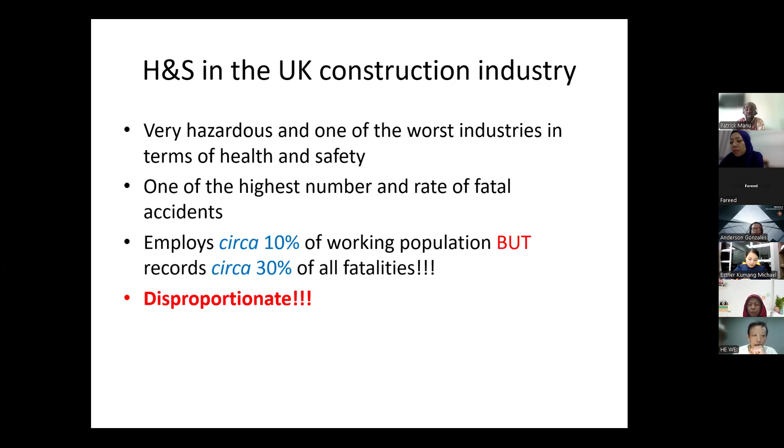The industry employs about 10% of the working population, but it accounts for about 30% of all occupational fatal injuries. So that's very disproportionate.

In terms of non-fatal injuries, there were about 53,000 of them over a 3-year period, 2020-21 to 2022-2023. Here are the things that accounted for them: slip, trips, fall on the same level, fall from height, and other things. That's a very huge number.

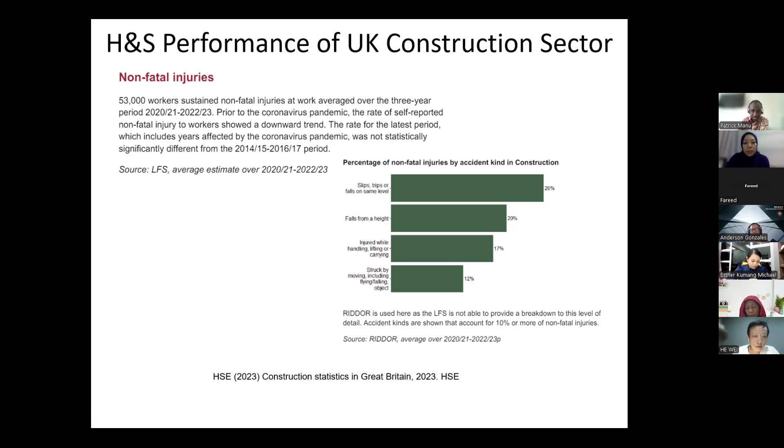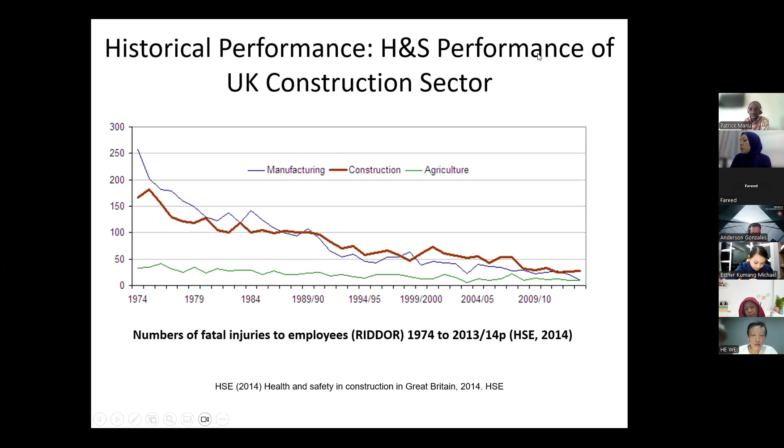It's dated now, but what I wanted to show you is the trend. Consistently over the years, construction has recorded the largest number of fatal injuries from 1974 to roughly 2013, 2014. There were times manufacturing topped it, but you see that construction beats it several times. It's been the worst. But the positive thing is that the trend is a downward trend, so we've been seeing improvement over the years, which is on the positive side.

Again, in terms of historical performance, this looks at the health side of things. The bluish box shows construction, and this one shows all industries combined. It's interesting seeing that if you put all industries together and compare that with construction, construction has the worst work-related illness record. That was from 2001-2002 all the way to 2013-2014. Things may probably be better when you compare construction with all other industries.

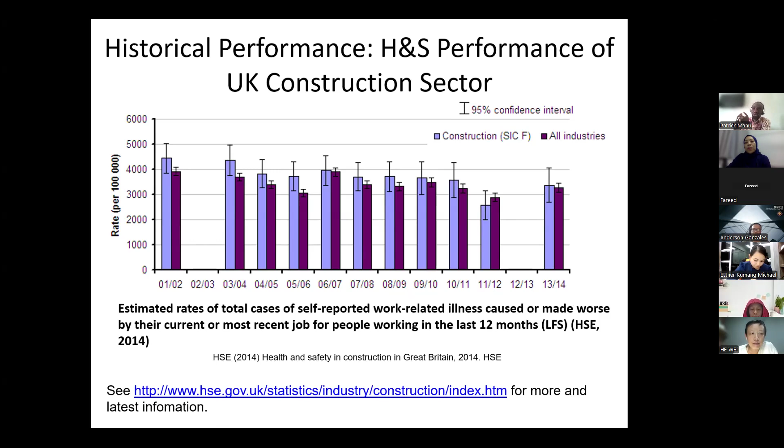But from the previous slide, you saw that having 69,000 ill health cases is still quite a huge number for our industry. So clearly, in terms of safety, that is injuries to people, construction is dangerous. In terms of ill health, construction is also a dangerous industry.

Now let's move outside the UK and look at what's happening in other parts of the world. This is from Eurostat, as at the time I think that was last year, that was what they had. They may have updated their database, but looking at this trend, it tells you that construction has historically had the worst health and safety performance compared to other sectors like manufacturing and agriculture.

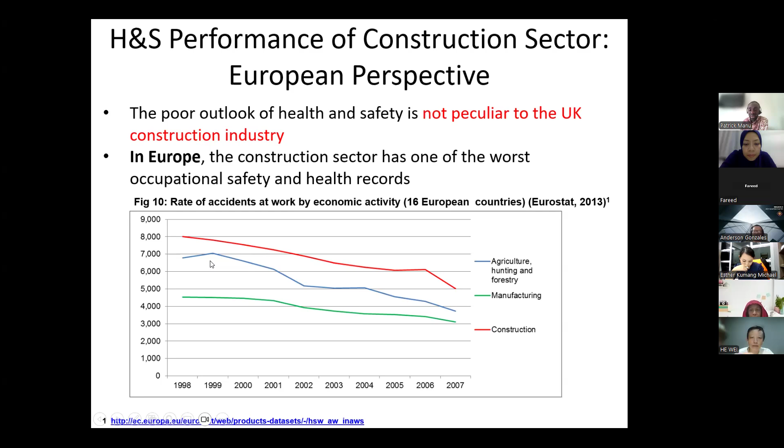If you look at the US, data I got from the US up to 2019, you see construction recording the largest number of fatal injuries - that's compared to transport, agriculture, government and other things. So construction is one of the most dangerous sectors in the US as well. In 2019, they had over 1,000 fatal injuries all across the US. Well, you can say the US is a big country with 50 states, so it's not surprising they have a lot of fatal injuries, but this number is still a lot.

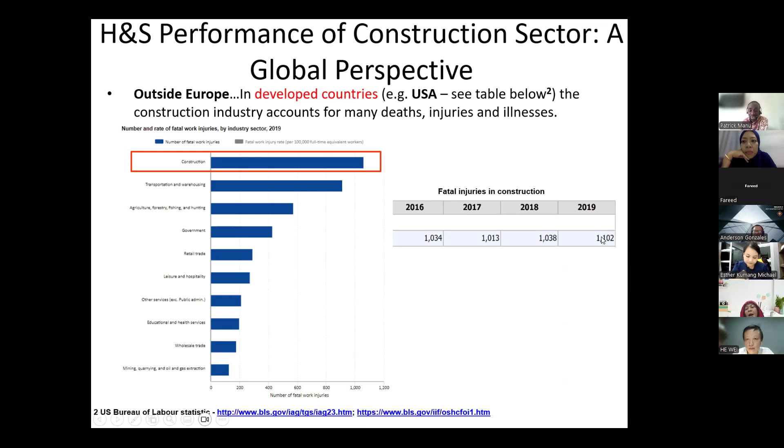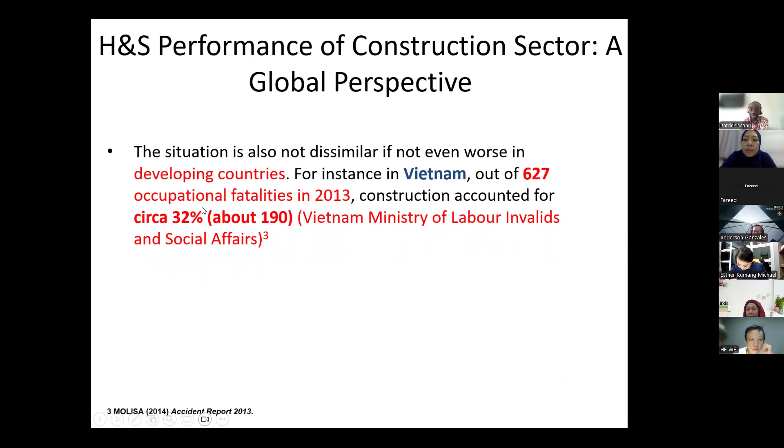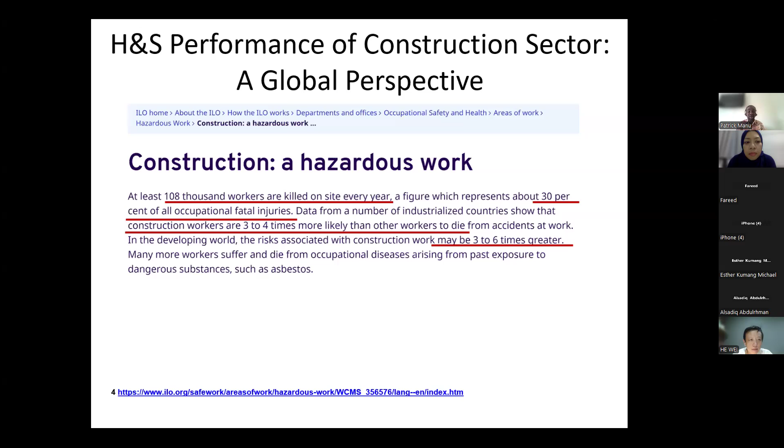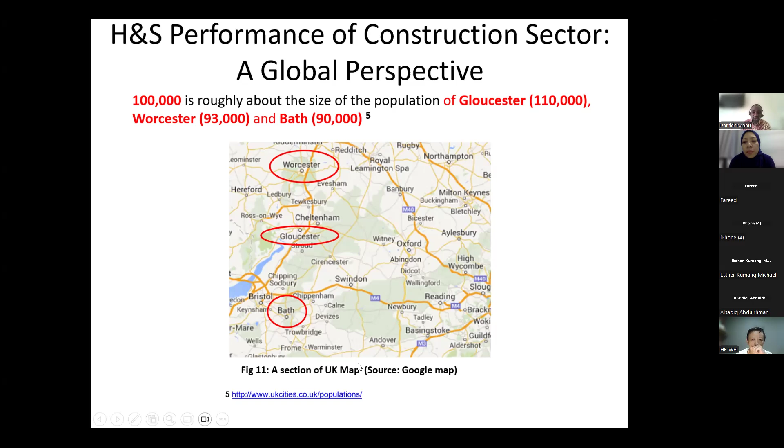Putting this global statistic into perspective, 100,000 is roughly the size of Gloucester in the UK, population about 110,000. Worcester is about 93,000 and Bath is about 90,000. So that's huge - it's like the entire population of a town or city being killed as a result of work in construction. That tells us we certainly need to do something to improve health and safety conditions within construction.

Okay, so now think about the next set of slides I'm going to show you. What are your thoughts on these images? What do you think about this site? You don't need to respond, but just think about it.

Is it very clean? I think cherish life and stay away from construction. Okay, good, thanks. So just think about it - you don't need to say anything or type anything, but thanks for that anyway.

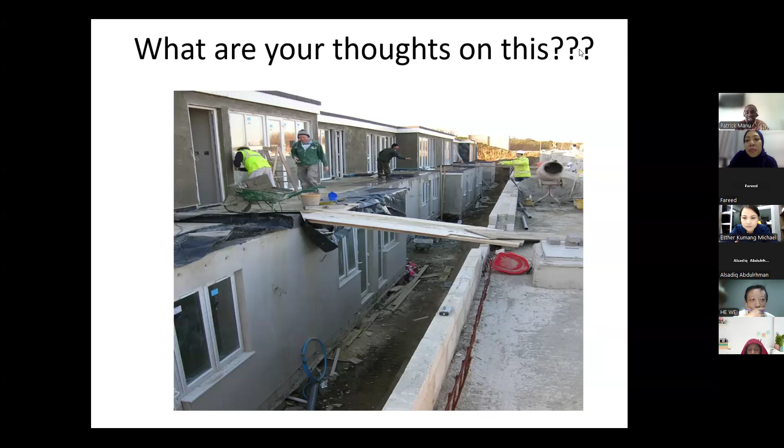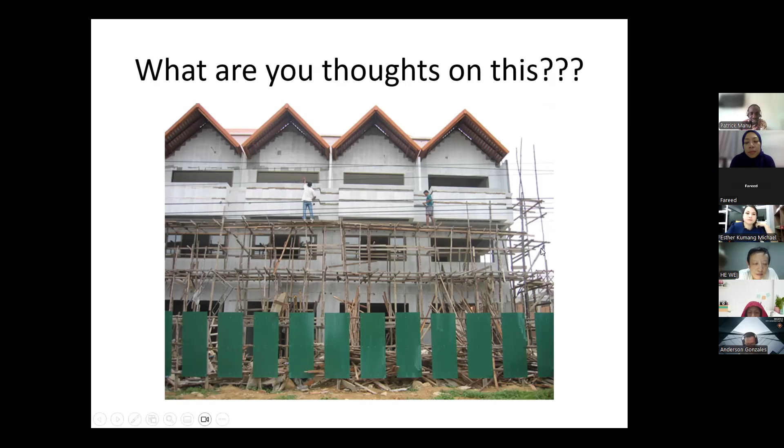But clearly you can see that it's an untidy site, and an untidy site is a dangerous site. That's another interesting image about a construction - you can see down there is very untidy, and people are working without fall protection, and it's very dangerous down there. Should someone fall, they'll be in a really bad state given how untidy the floor is. And some of the scaffold is probably not very stable.

So what do you think would be the outcome of those images we saw? This could be an outcome when things are not done safely - the collapse of a mobile crane. I think this happened in Manchester where I live, reported in the Manchester Evening News. I don't know the date, but it looks like it happened in Manchester.

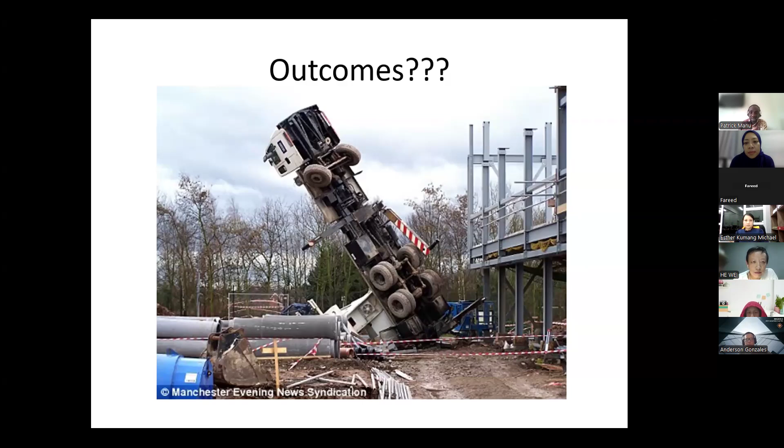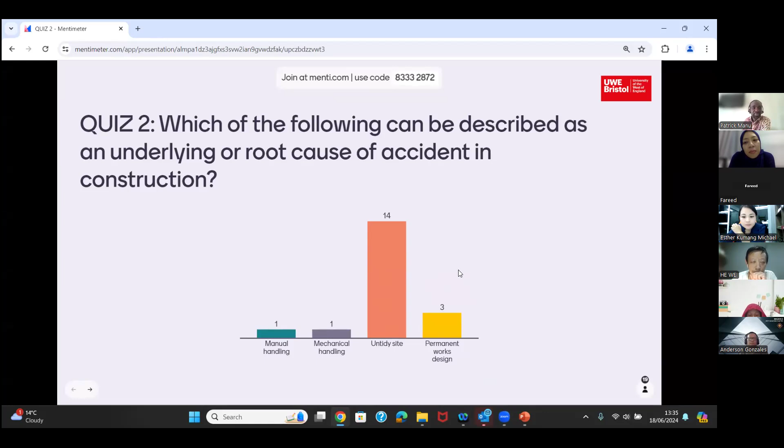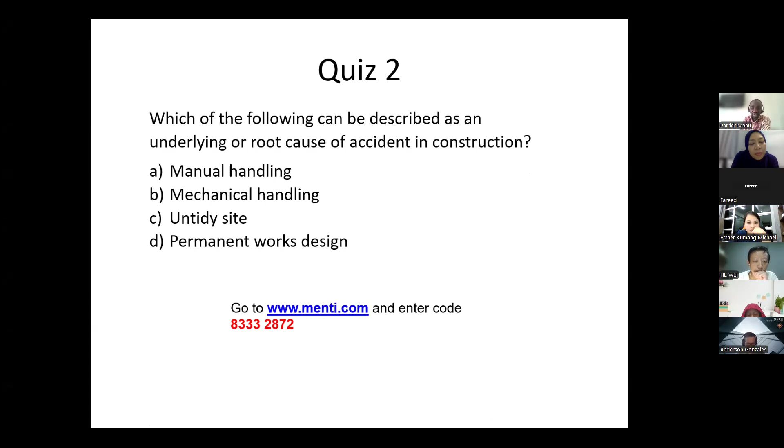Let's go back to our presentation, and you'll find out as we go on. So the case to improve health and safety in construction - we'll come back to this at some point. We've looked at the outcomes, and now we need to improve health and safety in construction.

So why do we need to do that? Okay, because apart from the injuries, deaths and illnesses, there are also economic and social costs that are associated with these injuries, deaths and illnesses.

These costs are borne by the employer, so that could be the contractor or subcontractor. They are borne by governments through medical care, providing care for people who get sick or injured. They are borne by the workers themselves, the employees, clients of the project, the whole industry, and society as a whole. So the costs are spread across several stakeholders.

And these costs can be very huge. For example, in the UK, the Health and Safety Executive, which is the equivalent of DOSH in Malaysia, estimated that it costs society about 1.3 billion pounds for health and safety.

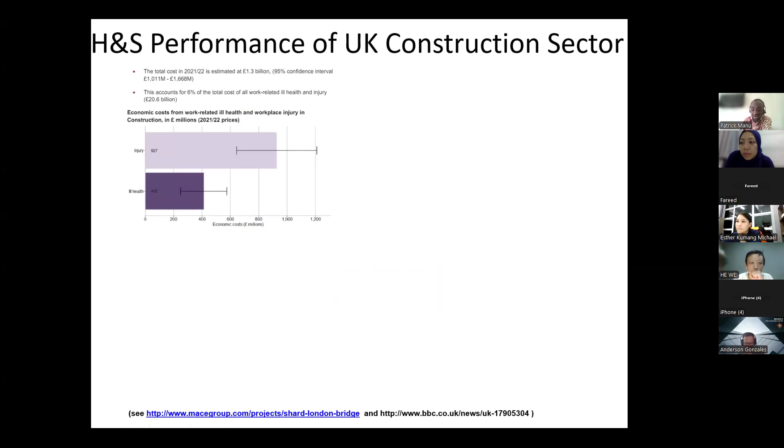So let's think about what we could do with 1.3 billion pounds. If somebody calls you today and tells you that you won a lottery of 1.3 billion pounds, guess what you can do with that amount of money. You could probably buy so many houses and maybe sell them or do something. So what can we actually do with this 1.3 billion?

In the UK, when we did the London 2012 Olympics, the Olympic Stadium cost about 500 million pounds around the time it was built. And the Shard cost around 500 million pounds as at the time they did that estimate. So you can imagine 1 billion pounds can get us one of this and one of that.

So if we are able to drive down injuries and illnesses in construction, that means the industry or society will be saving this amount every year, here in the UK. So that means there's a real need, apart from preventing people from getting hurt and injured, there is also the economic case to reduce illnesses and accidents and injuries in construction.

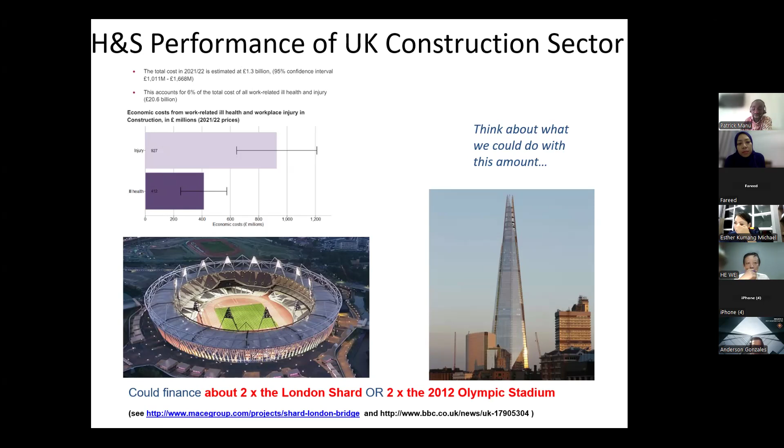So a lot of... and when we think about the cost of these accidents, whereas it's easy to estimate the direct cost, some of the costs are very difficult to estimate. So we may not actually know or fully appreciate the cost associated with accidents in the workplace or accidents in construction.

So there are other indirect costs associated with it, apart from the direct cost. And there are other intangible costs, like lowering the morale of the workers. If somebody gets hurt or killed on site, morale goes down because people feel they've lost a friend or a colleague, and that will dampen the morale of the workers, and damage the company's image. It's hard to quantify in terms of money, but if a company's image is damaged, they may not get work to do again, or for a long time.

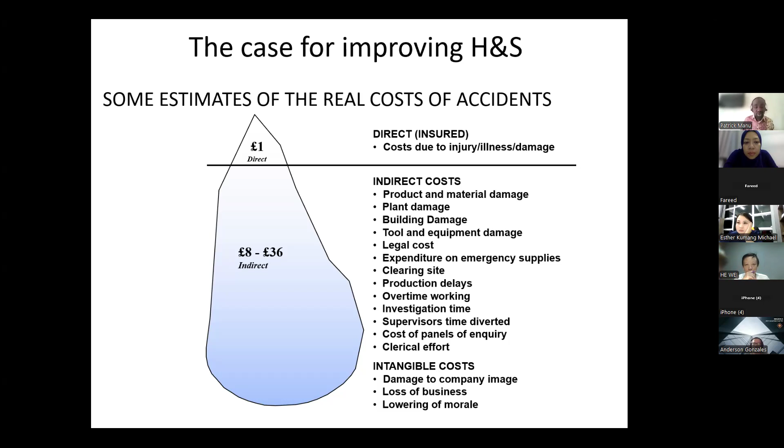So these are some of the costs associated with accidents in construction. So the quiz 3 is still there.

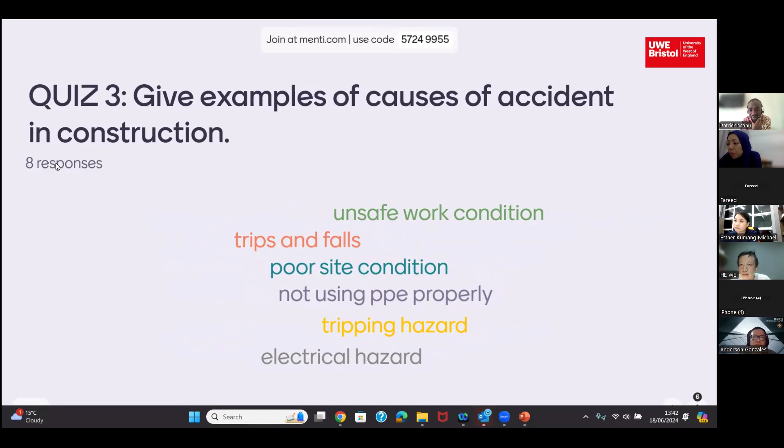Someone says trips and falls. So one person has responded. Any more? Unsafe work condition, tripping hazard. Not using PPE properly, electrical hazard. Overconfidence, that's interesting. Unsafe acts, that's behavior, the mindset or attitude of workers. Inadequate supervision.

Poor site condition. Illegal command - I guess that means wrong instruction. So we have electrocution and electrical hazard, so all talking about electrical issues.

Okay, so you've all given interesting, relevant causes. So now let's look at how these causes have been reported in the literature based on accident studies people have done. Let me go back to my slides.

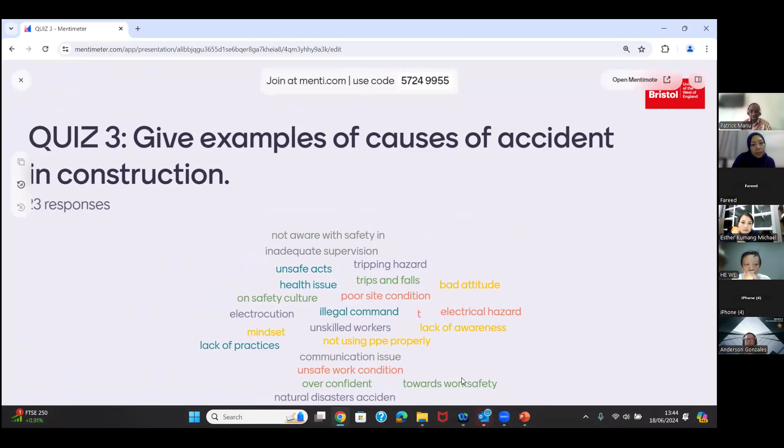We can come back to this later, but we'll come back to our second quiz at some point. So you gave examples of causes of accidents, and those causes you gave are relevant. In literature, several studies have been done to understand what causes accidents, because the idea is that if we know what the causes are, we stand a better chance to prevent them.

So these are some of them. These studies were done in the UK, a team at Loughborough University, a team at the University of Manchester - it used to be UMIST - and this one is from my own PhD research.

So these people did some studies and then proposed models of accident causation. The models of accident causation explain how accidents happen, so that based on those explanations, the idea is that we will probably be able to deal with them.

I can see a red cross across the screen. Okay, I think it's gone now.

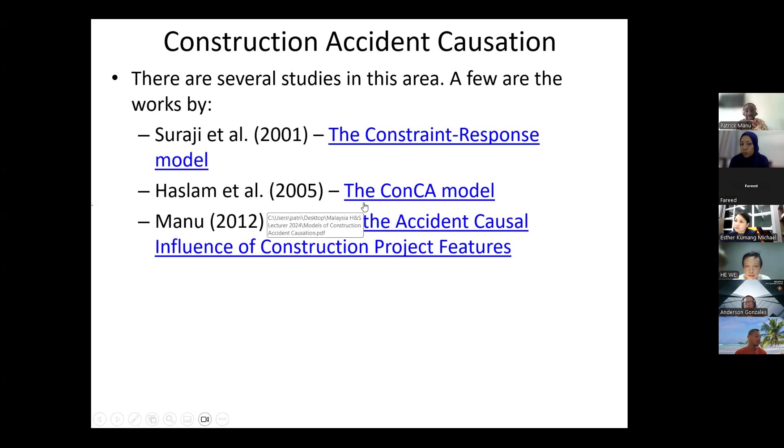And then this model by these folks in Loughborough, they call it the CONCA, the Construction Accident Causation Model. They investigated, I think, 100 cases of accidents, and they proposed their model.

Okay, let me just hold on. Let me try and see if I can find the models. I think I have them somewhere here so I can share them with you. Okay, good, I can see it. So I have them with me here. I'll quickly talk through them. Resume sharing, okay.

So this is the constraint response model. They are saying that the physical and business environment will induce some project conception constraints, and then there will be a response from the client. There'll be project management constraints coming from here, design constraints, and then the project management team and design team will respond. And when they respond, it induces construction management constraints.

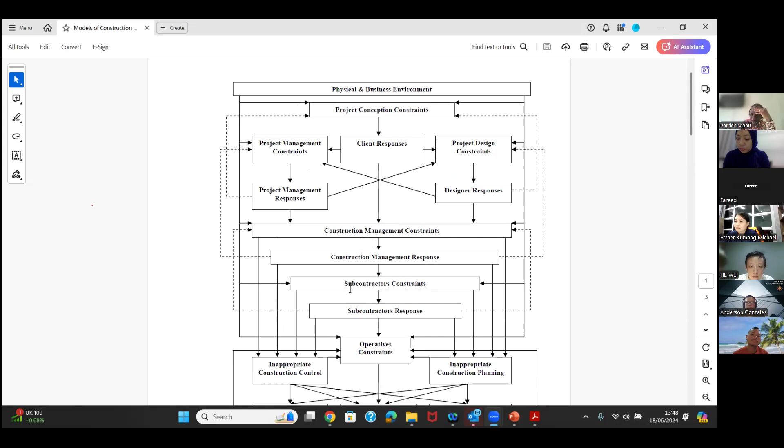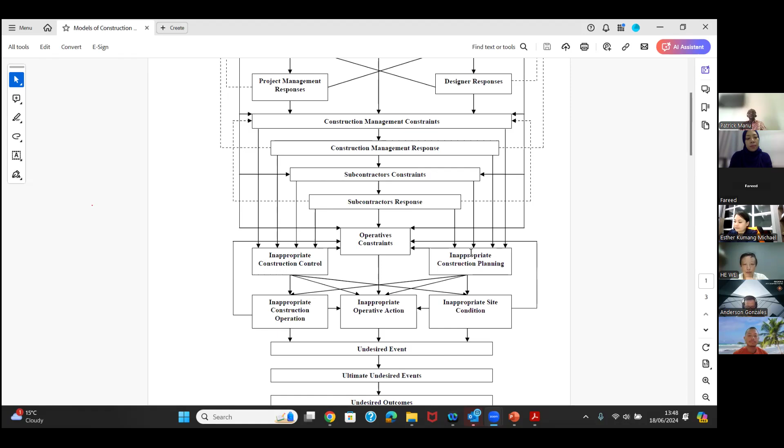And then the construction management team will respond, which will induce subcontractor constraints, subcontractor response - that process keeps ongoing. And then they induce operative constraints and other constraints, and then they lead to inappropriate construction control, inappropriate construction operation, inappropriate operative action, inappropriate site condition, inappropriate construction planning, and then they lead to the accident.

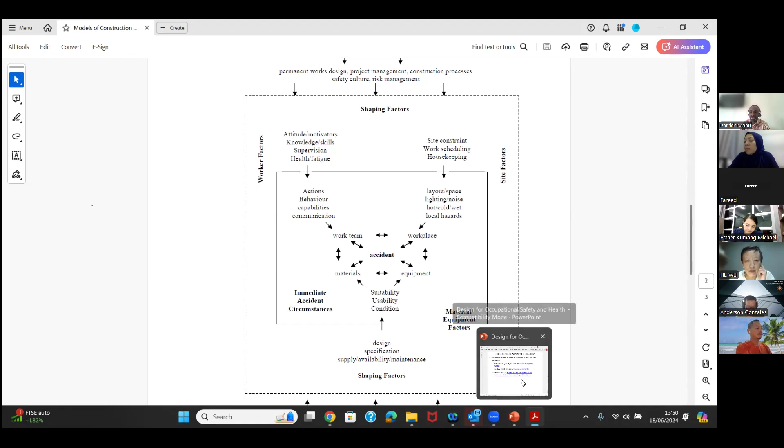And in terms of the distal factors, they say that under project permanent works design - so design is an underlying cause of accident, a root cause of accident. Design can affect these other factors, and then these other factors will affect these, and then lead to the accident. So that brings me to the quiz - I think that was quiz number 2.

So let's see those of you who got that quiz correct.

Okay, so 14 of you said untidy site. Only 3 of you said permanent works design. So that is the correct answer.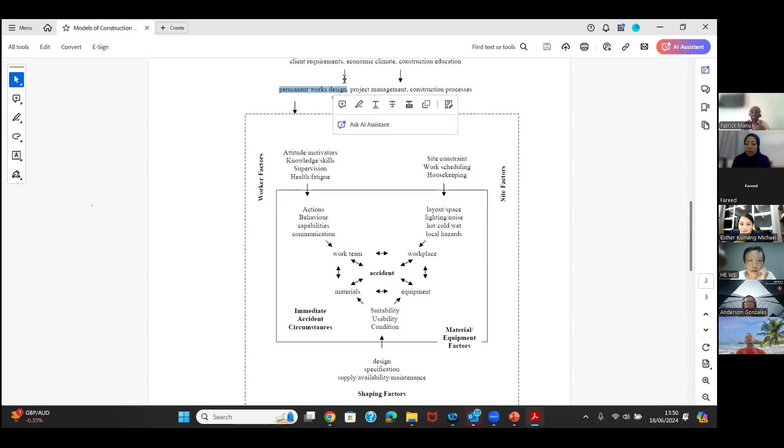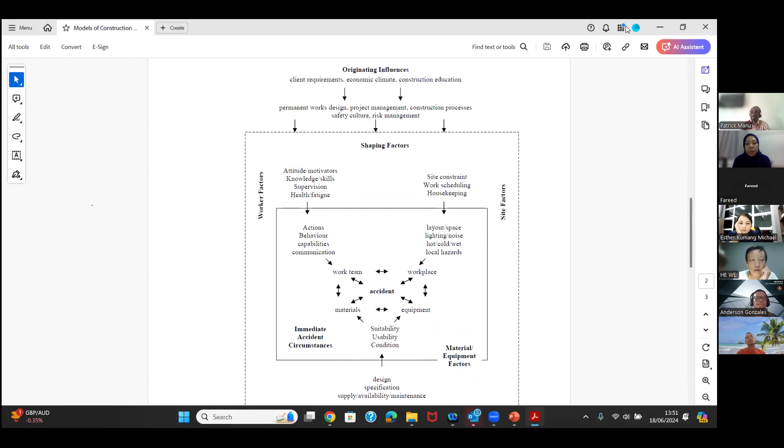From the model we can see that permanent works design, in other words how a building has been designed, is a root cause of accidents, an underlying cause. These other ones are immediate or proximate causes because they are closer to the occurrence of the accident, but permanent works design is further away in the causation process. So manual handling, mechanical handling, untidy site - we call these proximate causes, because they are closer to the occurrence of the accident than the permanent works design.

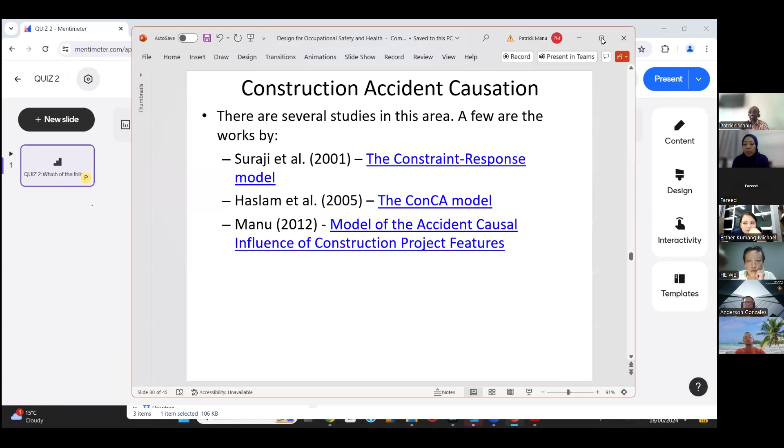So let me go back to my slide. Okay, so quickly - oh, looks like I have a few minutes left to cover this with you. Okay, so repeat.

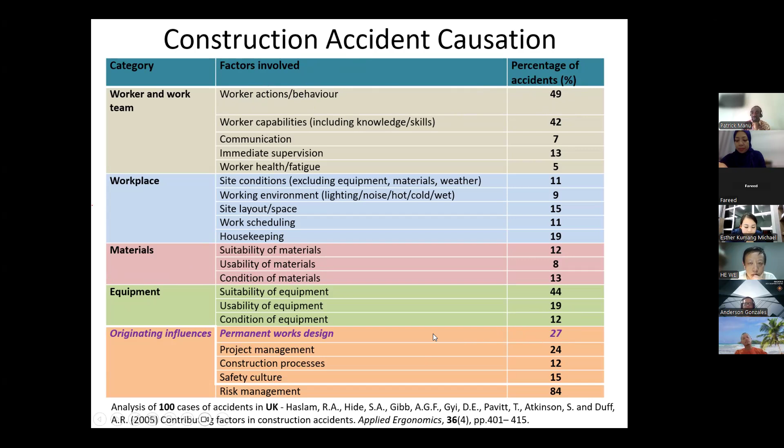So these are some causes of accidents from the studies that the people in Loughborough did. You can see that workers' behavior contributed to almost half of the accidents they investigated, so worker behavior is a key contributor to accidents. They also found that design contributed to about 30%, about a third of all the accidents investigated, so that's also a significant one.

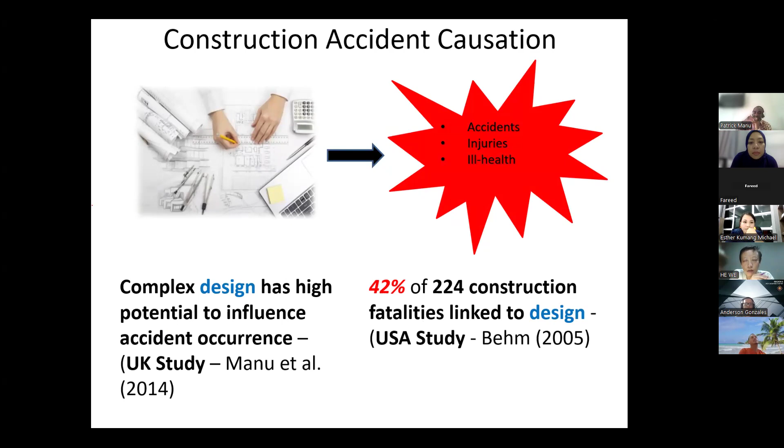So clearly, my own research showed that complex design has a high potential to influence the occurrence of accidents. Another study done in the US investigated 224 fatal accidents and found that for 42% of them there was some link to how the design of the building or structure was done. So there's a lot of studies that demonstrate the link between design and accidents.

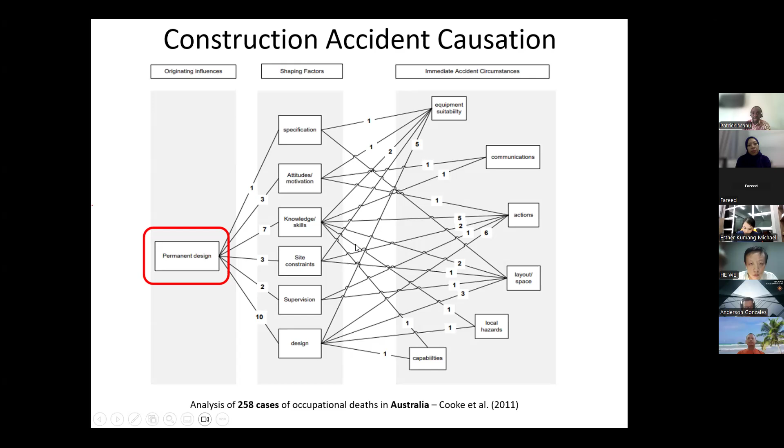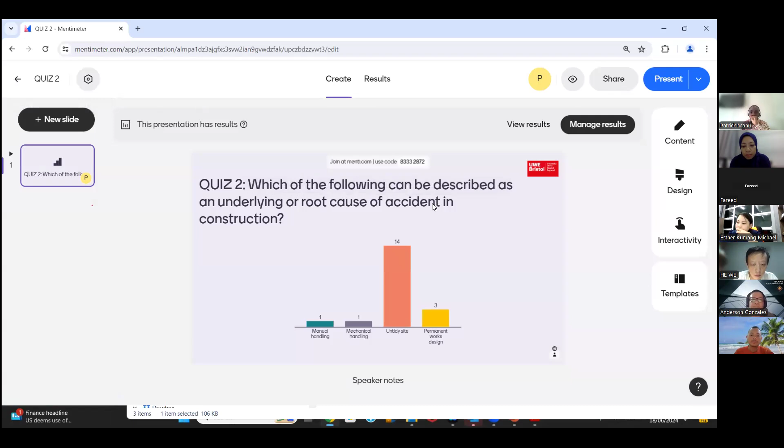Okay, so which stage? Based on what we've done, which stage of the construction project life cycle offers the greatest opportunity or ability to influence safety? Let's go to menti.com - I'm going to launch it because I'm conscious of time now. That's quiz 4, I want you to tell me what you think.

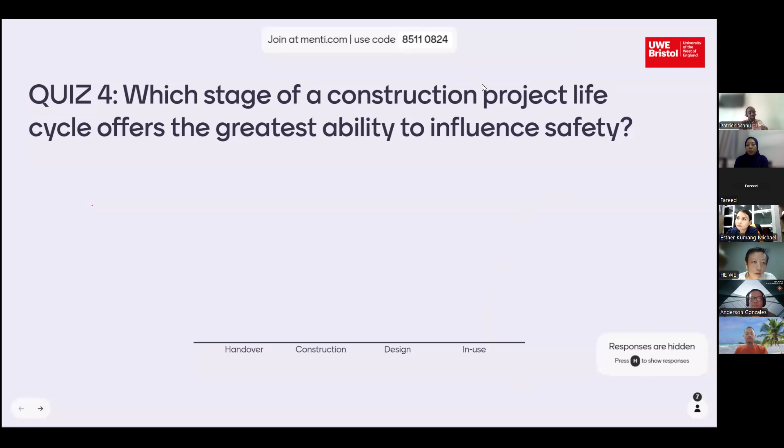Present - okay, so which of these stages gives the best opportunity or ability to influence safety on a construction site? The code is 85110824. Let me put the code in the chat so we can carry on. That's question 4, that's the code.

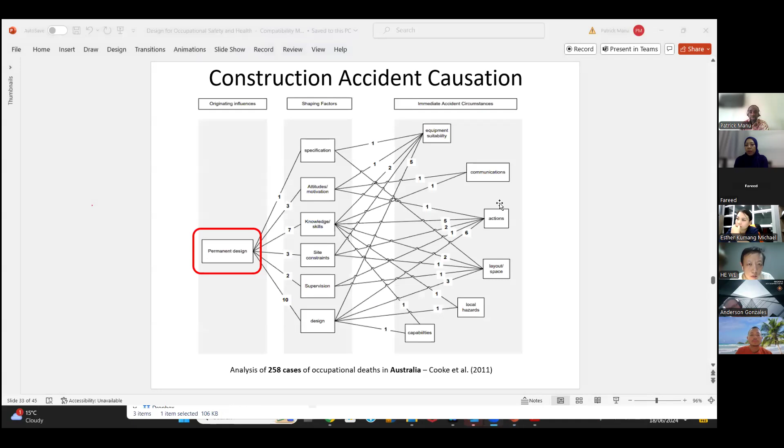Let's get the responses because the next slide will give the answer. Okay, because of time let's show what people have done. I have 16 of you, that's 17 of you - that's not bad. Okay, good, that's really encouraging.

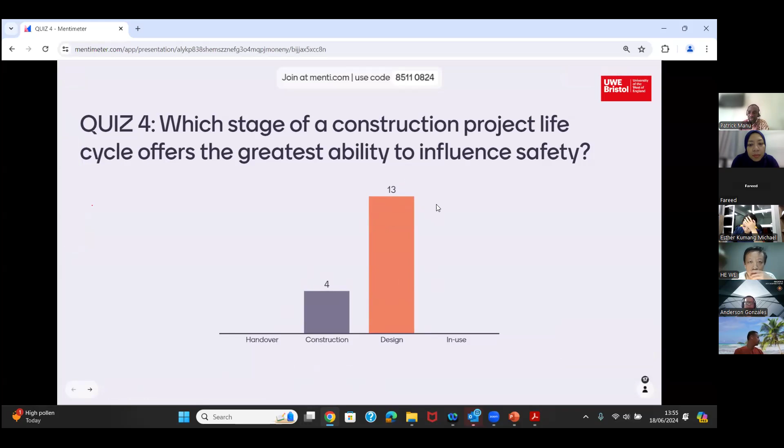So 13 of you say that the design stage gives the best opportunity to influence safety, and that is absolutely correct. Okay, let's go back to our slides.

Some of you may have come across this time-safety influence curve. What it suggests is that the earlier phases of projects give us the best ability to influence safety. So as we progress from design to construction to the close of the project or handover, that ability to influence safety goes down.

And the same can be said of other things like cost. Our ability to influence cost on a project is greatest at the start. Once you start doing designs and get into construction, it becomes more expensive to influence cost, because if you do a change in the design the cost might be very, very high. In the same way, our ability to influence safety is greatest at the design stage, and that is where the concept of design for health and safety comes in.

So design for occupational safety and health. The design phase gives us the best opportunity, it means that designers, clients, and other members of the project team need to do their best at that stage to be able to influence safety.

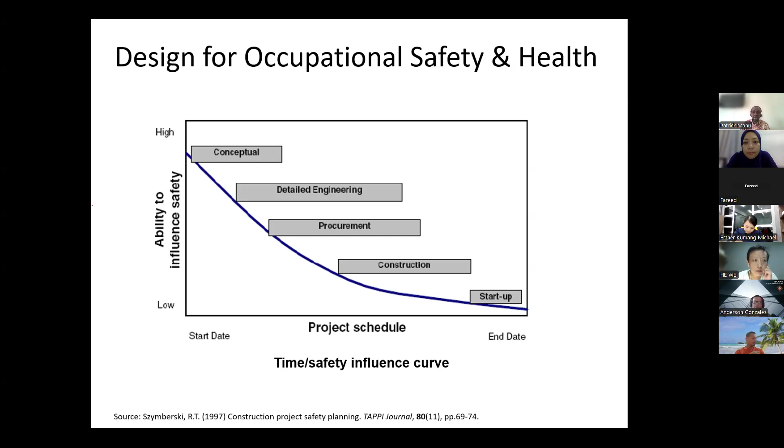Okay, let's move on quickly. The concept of design for safety is also aligned to the hierarchy of risk control. In safety and health, there is this concept of hierarchy of control, and it simply says that we should do our best to eliminate hazards. That should be the first thing we need to do.

When dealing with health and safety risk or hazards, our first priority should be to eliminate or substitute the hazard. If that is not possible, then we need to think about other things like reducing or limiting exposure to the hazard, isolating or segregating people from the hazard. If we cannot take the hazard away, let us limit or reduce exposure. If we can't do that, then let's segregate people from the hazards. Or we can bring about engineering controls, safe systems of work, provide training, and PPE.

So PPE should be the last resort. But sometimes on construction sites, the first thing people think about is to give PPE to people. No, PPE should not be the first thing we think about. The first thing to think about in dealing with safety and health issues is to remove the hazard in the first place or to substitute the hazard.

So the design for health and safety concept is aligned to the hierarchy of control. When we do design for safety, the idea is that we are removing the hazards by designing them out. For example, if it's a tall building, a multi-story building, is it possible for us to design it such that there will not be the need for people to work at height?

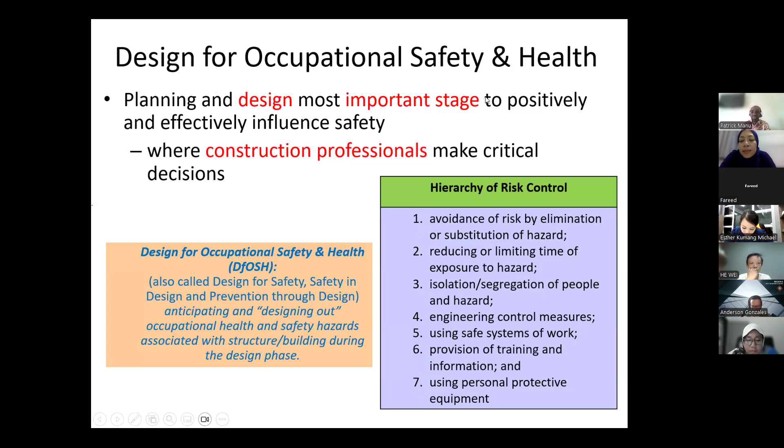So planning and design is the most important stage to influence health and safety, and there are some case studies to demonstrate that. Because of time, I will not go through all of them, but I'll just show you one example. When you get the slides, you can look at them. So one example is this.

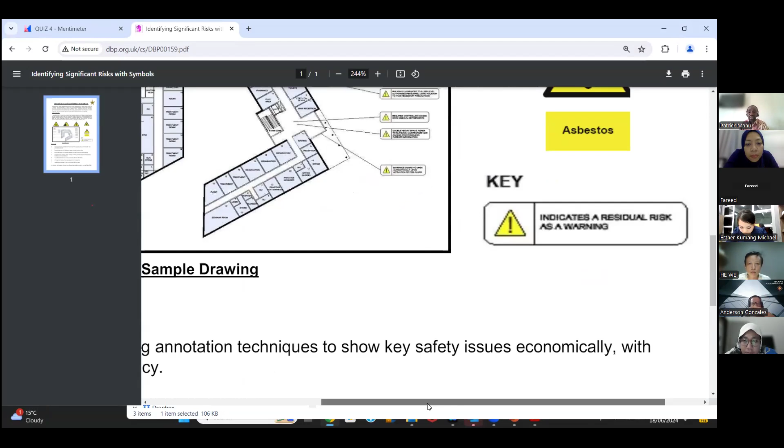This example shows what designers can do by providing hazard symbols on drawings. When designers prepare their drawing, these days it's easy to do that with BIM. They can put some symbols on the drawing to alert the construction team so they know that these hazards are present in these places of the project or of the design.

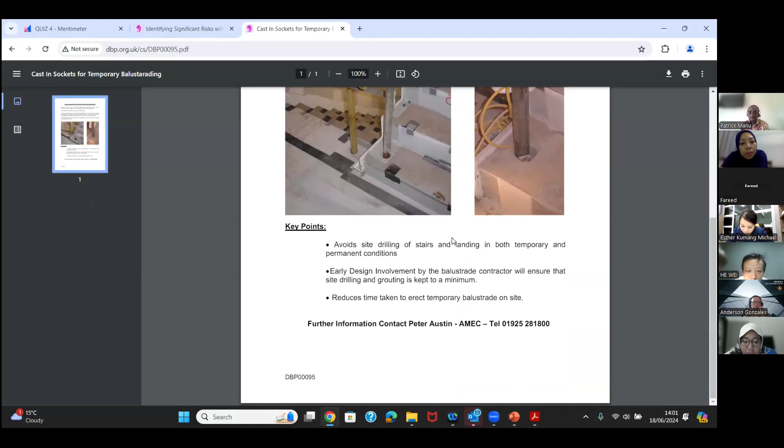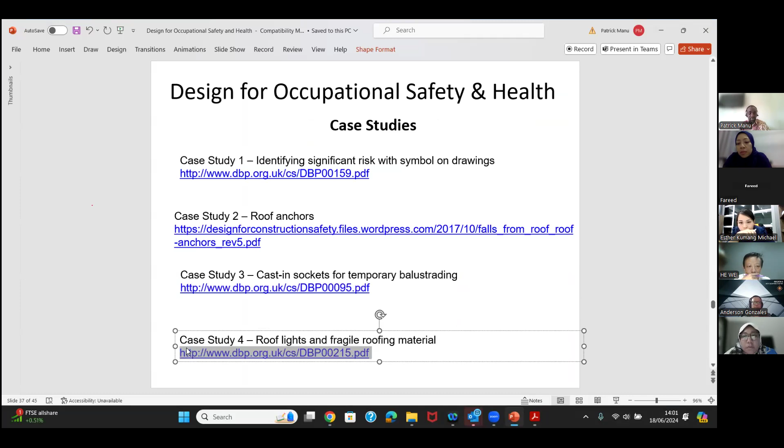Let me quickly show you another example. So what designers can do—this is a case where they've tried to put some balustrades in as they are building, so that people don't fall during construction.

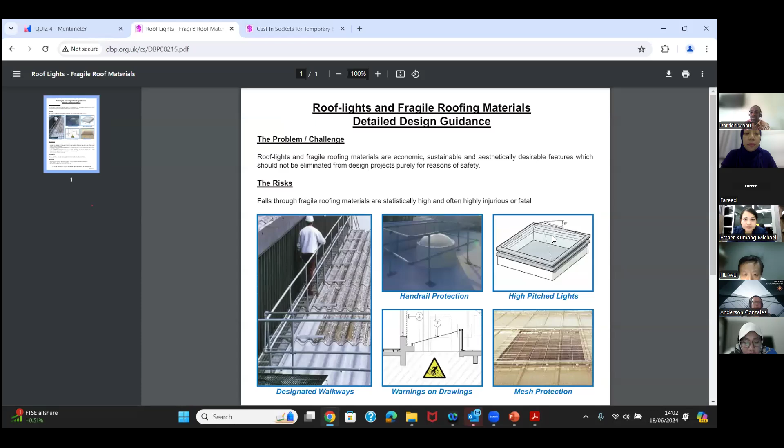To prevent people from falling through the roof where they have light glass in the roof, they can design it to have some mesh protection, or they can have some balustrade railing over there, or put it around wherever that glass is in the roof, to prevent people from falling when they are doing maintenance work or other things.

Okay, quickly, I'm almost done. So design for safety - what are the factors that influence implementation of design for safety in construction? Several factors: attitude of designers, awareness and knowledge and education of designers, the availability of tools to help designers do design for safety, and the influence of clients is very important, and then legislation.

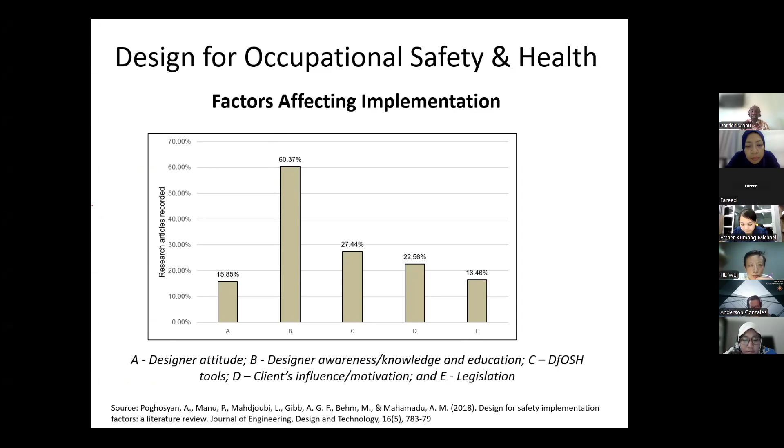These are things that affect or influence implementation of design for safety in the construction industry. Talking about regulation, some countries recognizing the importance of design for safety have introduced regulations to make designers think and assess the risks associated with their designs, and then for them to implement things to remove those risks or to inform contractors about those risks.

So in Australia, they have this regulation. In UK, we have the CDM. In Singapore, and then in Malaysia this year, they introduced the Occupational Safety and Health Construction Work Design and Management Regulation, which draws heavily on the UK version of that regulation.

So the whole idea is that these regulations place legal duties on key people or key organizations. The UK one places a duty on the client, designers, contractors, workers, principal contractors - that is where there are multiple contractors on a project - or principal designers, if the project meets some criteria, they need to appoint a principal designer. All of them have duties and responsibilities under the regulation to ensure that designs are prepared or modified in a way that they are safe for people to build or construct, and the others also have various duties under those regulations.

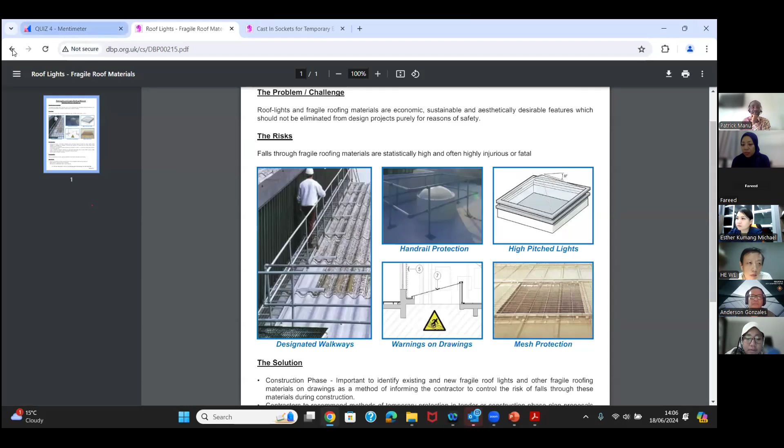Okay, so who is responsible for health and safety of workers on construction projects? Who do you think is responsible? Okay, so tell me what you think quickly. And whilst you answer, if there are any questions, this is the time to ask, please. So any question, please feel free to ask.

Okay, so here are the results. This is the correct answer: all of the above. Health and safety is a responsibility of everyone on the project - the client, the designer, the contractor, the workers. So health and safety is not just the responsibility of designers or contractor or worker, but it's everybody's responsibility.

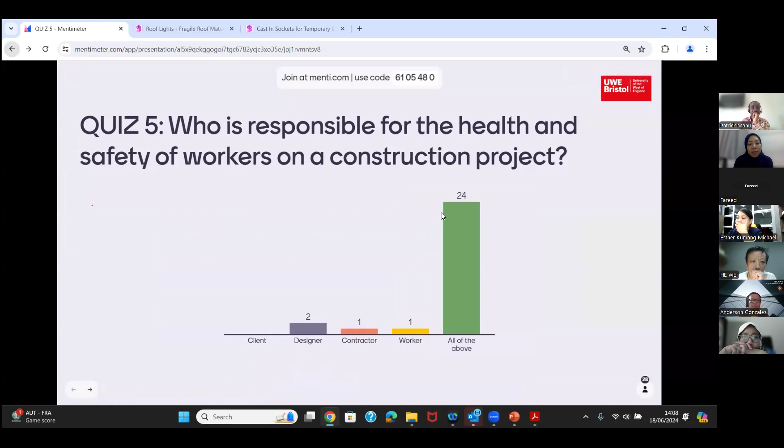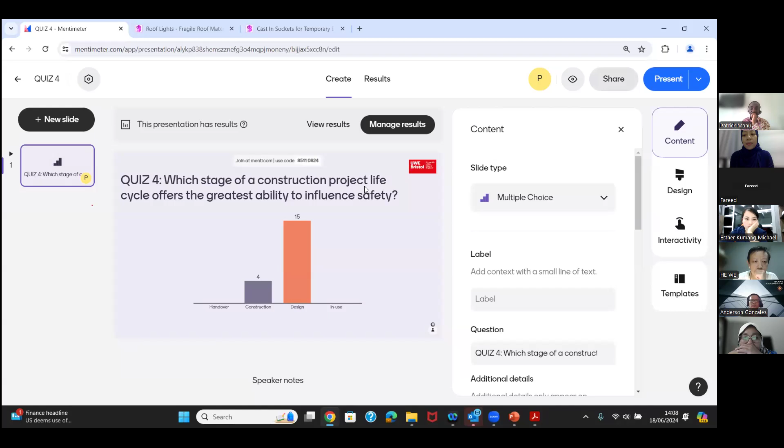Okay, and then let me present the results for quiz 4. I'm not sure we looked at that one. Let me see. So quiz 4, what was the result for that one? Okay, I think we looked at it already. Yeah, we looked at it already. So it's the design phase. Which stage of the construction life cycle offers the greatest ability? That's the design stage. So 15 of you said the design stage, that's the correct answer. Let me present it. So that's the correct answer, design stage. Okay, so we talked about it already.

So I think that brings me to the end of my lecture. If there are any questions, please, this is the best time to ask them. So let me pause sharing.

And then I see that Anderson has a question. So Anderson, yeah, please, you can ask.

Yes, doctor. Do we have a standardized tool wherein we can use anywhere globally to assess risk, especially in construction?

Just give me a second. You mean standardized, wait, let me stop. I don't need to share. Let me stop sharing. Just give me a second. Yeah.

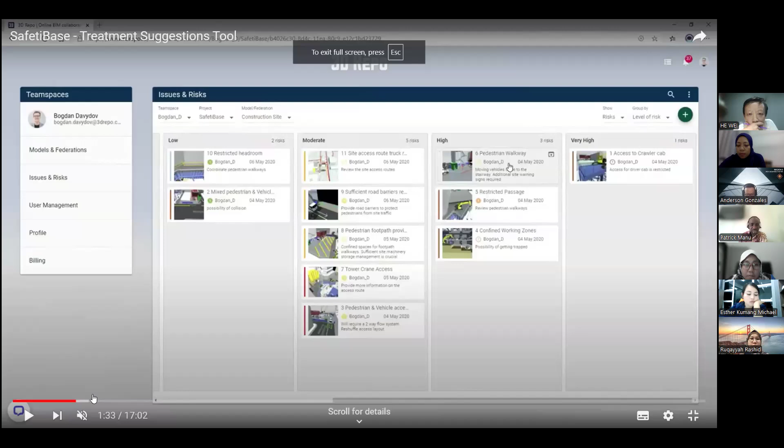So this is the project that I was referring to. It's called SafetiBase. We developed this tool from a research project we did here in the UK.

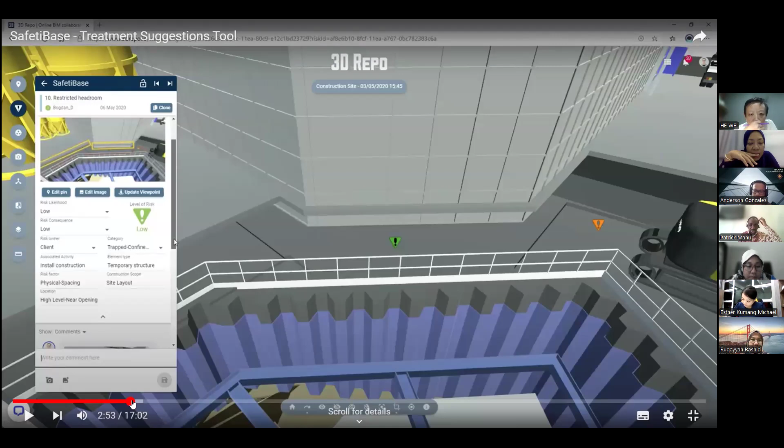What the tool does is, you have a BIM model, and then you go into the model and highlight a place where you think there is a hazard. The tool then enables you to indicate and assess the level of risk, and also to indicate what solution or measure you want to apply or implement to deal with that risk.

But the data that informed this tool was based on accident data from the UK. We worked with the Health and Safety Executive, the equivalent of DOSH, and used data they provided to inform the development of that tool. We also engaged with industry professionals for them to tell us how best to deal with those risks.

There were several risks, but for this project I think we focused on fall from open edge, and there were several scenarios that could lead to that. For those scenarios, we worked with professionals for them to tell us how to address each one throughout the project process — from early design, what can you do to address it; from detailed design, what can you do; and when you move to the construction phase, what can be done to address that. So for such a tool, you could still use it in Malaysia if you feel the content or insights used to create it are still relevant for that context, which I think they are. Nothing stops you from using tools developed in other parts of the world.

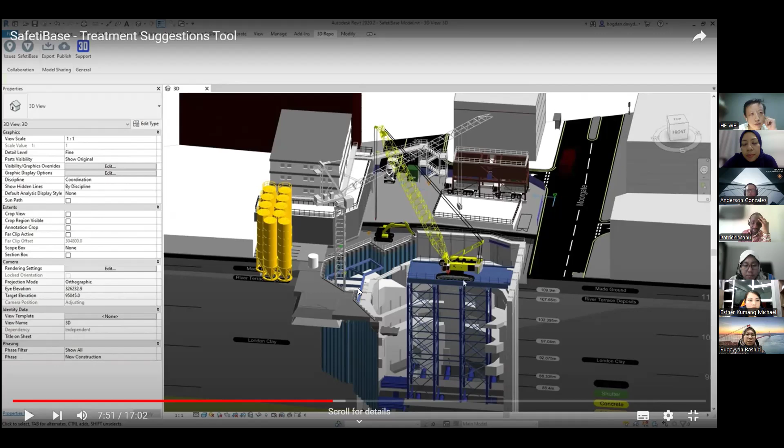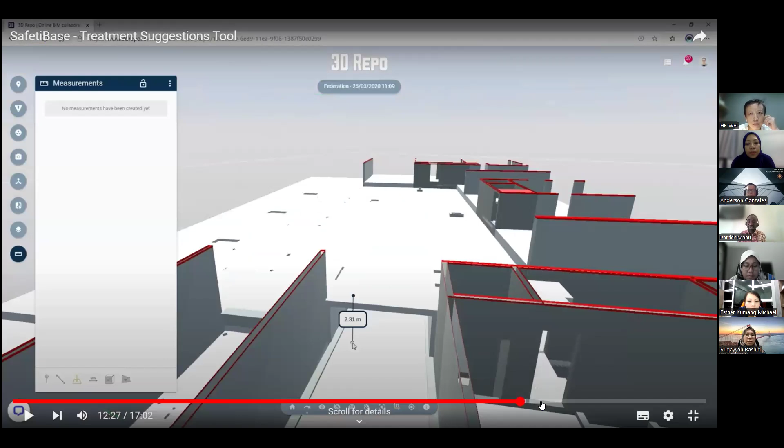But certainly, if a tool has been developed with data or insights from a particular region, that can be very helpful. When I give you the slides, you can take a look at the video — it tells you a bit more about how the tool works. If you want to get a copy, it's called SafetiBase. You can go online, search for it, and contact them to see if your company would find that tool useful.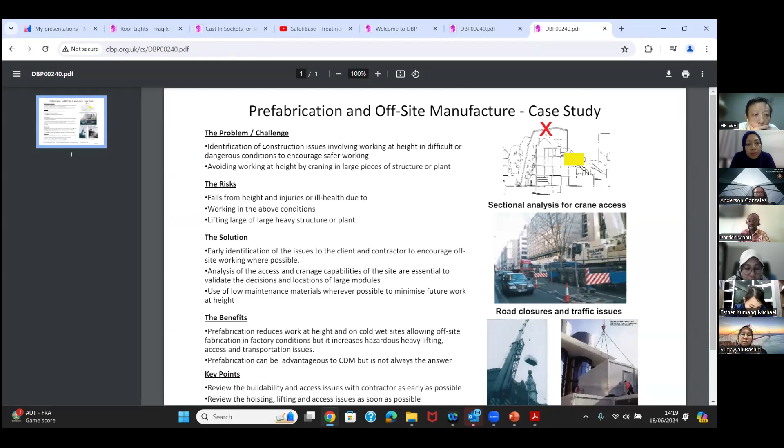So that was put there in 2015, so that was some time ago. It tells you what the challenge or the problem was, what the risk was, what solution they proposed or did, and what the benefits were. This resource is a very good one, particularly for design for safety.

So I'll encourage those of you who are into that, or if you know colleagues or design practices that are trying to improve their design for safety implementation, this is a very good resource they can use.

And then this other one is from the US. This is also a very good one. It has several materials about that. So if you go there...

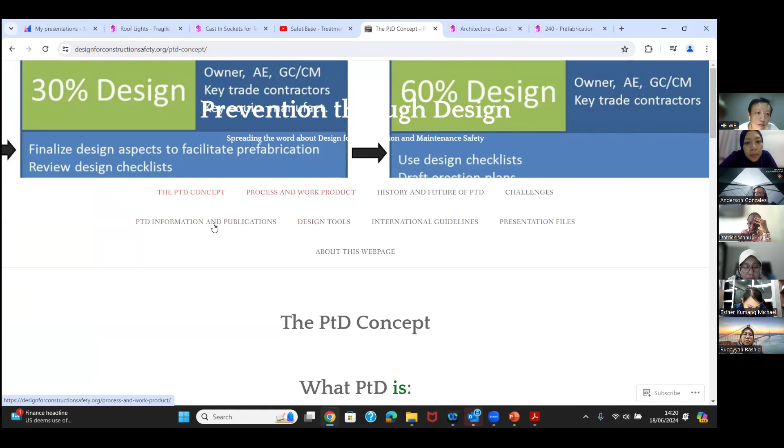So they have things about relevant publications, tools, processes. So if you go to the tools, for example, there are several tools they've suggested that can help.

So that's what I will say, these links will be very helpful for you. And this is a tool I developed myself, that's a BIM risk library tool.

But in response to your first question, you talked about factor of safety. So the factor of safety is also done by structural designers in the UK. I remember when I studied for my undergraduate, I did reinforced concrete design, I did structural steel design, and as part of that, you need to incorporate factor of safety.

So for example, if the load is supposed to be, maybe, I don't know, 5 kilonewtons per meter squared, or whatever it is, the factor of safety will increase that load so that you design to take into account a worst case scenario.

So those practices are there, but design for safety talks about protecting the workers who are building the building. The factor of safety is to ensure that the building will not collapse after it's been built, so you are building into it some more strength.

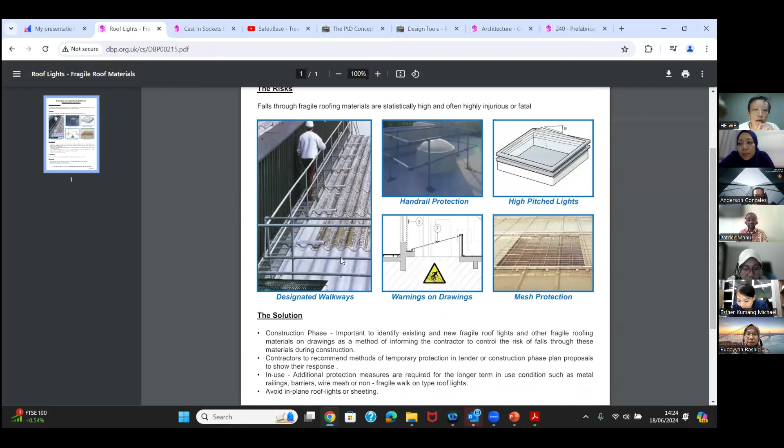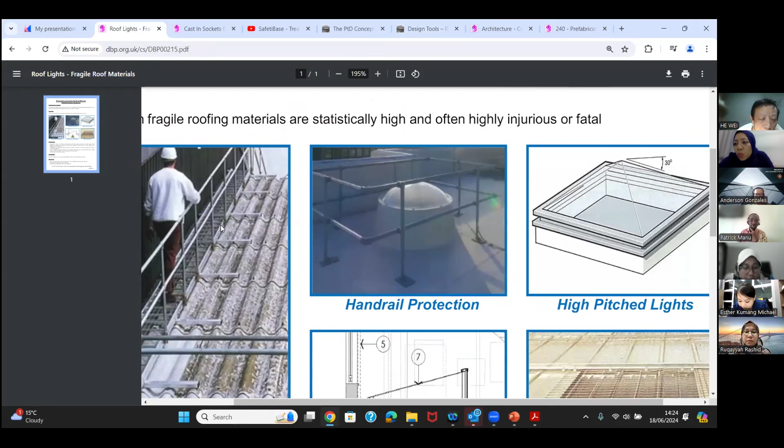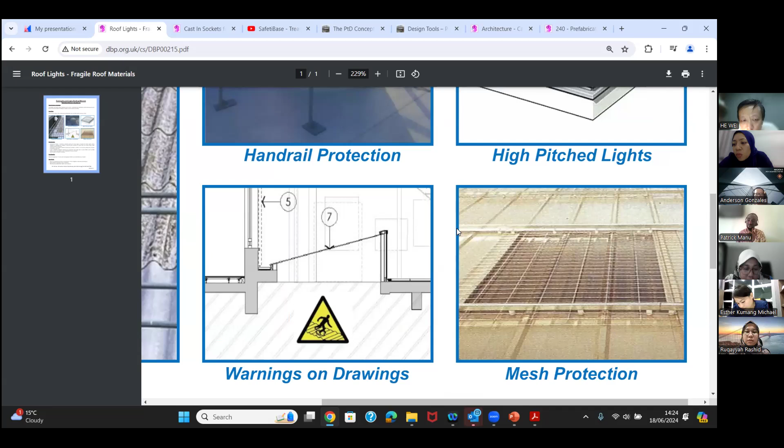For example, this one: you've designed to include a rail around this item so that people will not go close to it and fall down through it. You've included railing at the edge of the roof so that when people are up there working, they will not fall over. Or you've designed to include this mesh over this space in the roof so that workers, when working up there, will not fall through it. That is what we mean by design for safety and health in construction.

A question from the chat: normally for our construction, the temporary work is designed by the contractor after they got the design. So from this topic today, I believe the designer needs to include in their original design consideration for the temporary work design, is it?

So in the UK too, we have temporary works designers, people who specialize in designing that. In the same way, they will also need to think about how their designs can cause harm to workers and try to mitigate those risks posed by the design of the temporary works. But with design for safety, the focus tends to be on the permanent works design.

So the final building or the final bridge, whatever it is - how it's been designed. Are there any things about the design, whether materials, specification, or maybe the shape, that can pose risk to the workers? Then they try to mitigate those risks, either by designing them out, or they can highlight those risks to the contractors for the contractors to be aware of them and put in place things to address them.

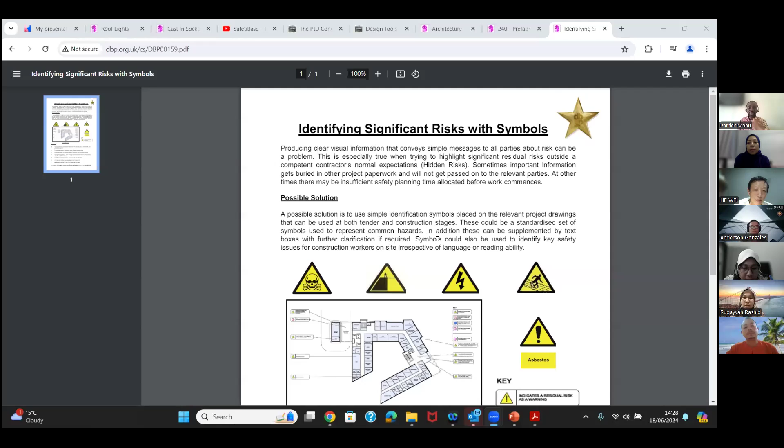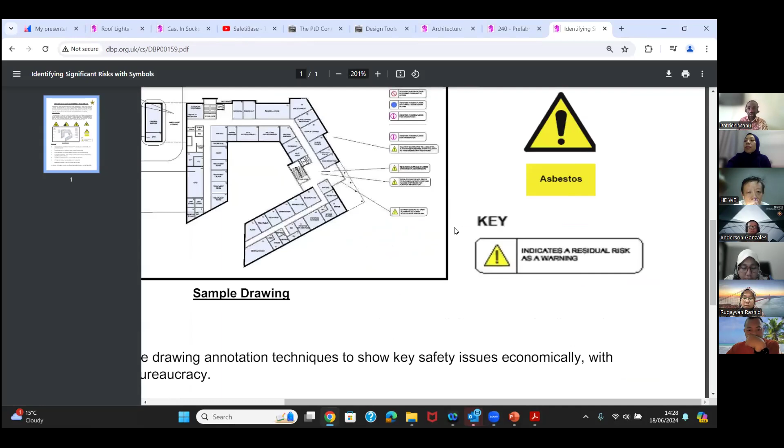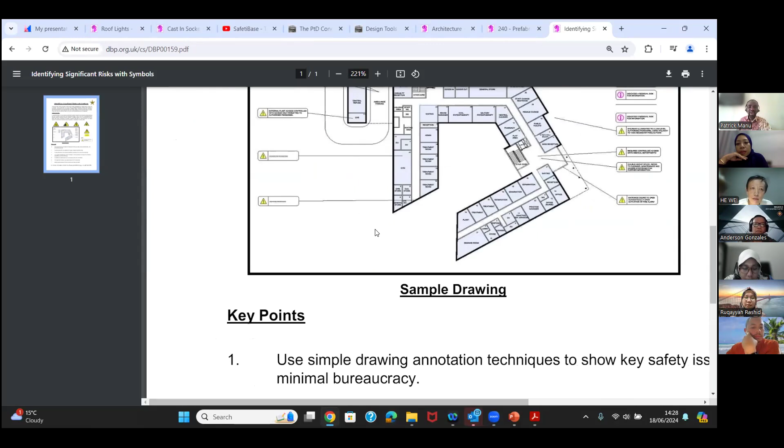So this example - in the past, in the UK, when the drawings were 2D drawings, these days we have BIM and other things. The idea of the hazard identification drawing was that contractors use drawings to build, and they would always read drawings. So is there a way for designers to highlight on the drawings where hazards are?

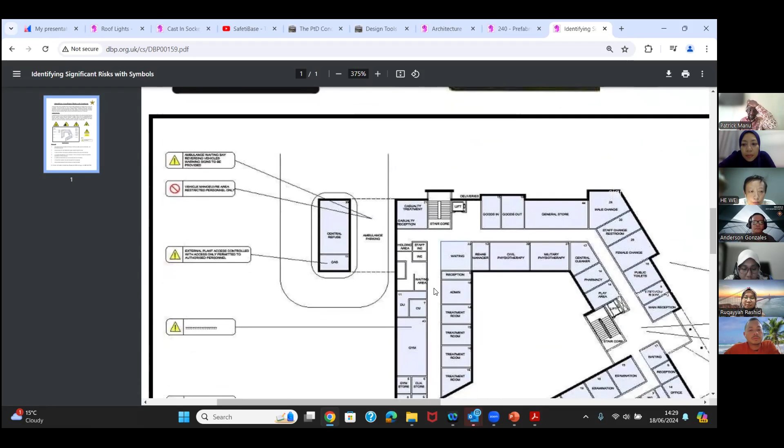So that contractors can be aware of those hazards in the drawing. If a designer is unable to address a hazard by changing or modifying the design or introducing a design solution, what they can then do is notify the contractor of such hazards, so that when the contractor comes on board, they can implement appropriate measures to deal with those hazards.

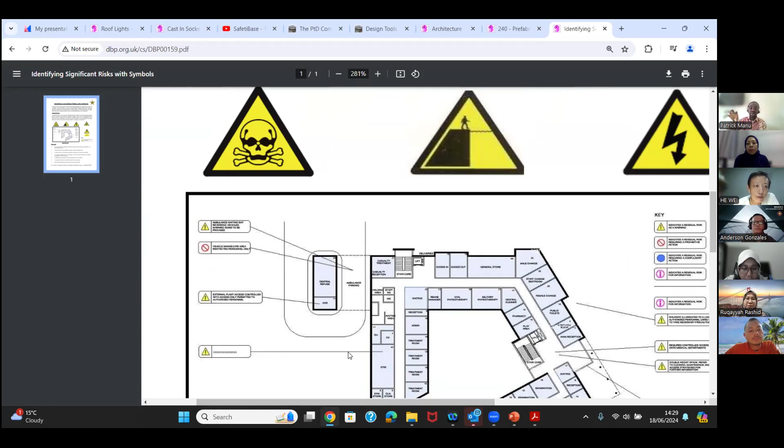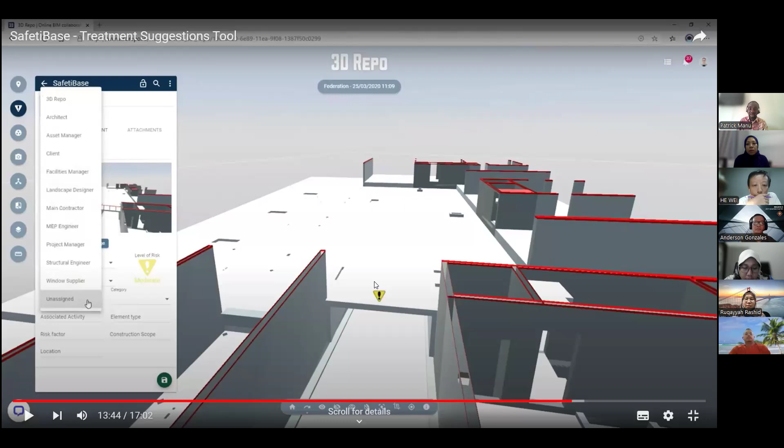But these days we have BIM, which is not a 2D representation but a 3D representation. So in BIM, designers are able to highlight those parts of the design where hazards are, and that is how this tool works. In the BIM model, they've put a sign there to show there is a hazard over here, and when they click on it, information about that hazard will appear, including how to mitigate it.

Okay, Doctor. Is there any questions? I'm conscious of time. Any question, guys? I think one more question, Dr. Patrick, in message.

How does the UK implement design for safety in the construction sector? Is it the same designer, or do we need to appoint a safety specialist to provide input during the design process?

I'll say it's done the same way as in Malaysia under OSHCIM, and now the new regulation. In the UK, under the UK regulation, the designer has a responsibility. So all designers - civil, structural, mechanical - so long as you are appointed a designer on the project, you have that legal responsibility.

Let me read it to you. Designers are organizations or individuals preparing or modifying designs for construction work, or arranging for or instructing others to do it. Designs include drawings, design details, specifications, design calculations, bill of quantities. So anybody - whether you are an organization or individual, whether you are preparing or modifying it, or instructing others to do it - the legal duty to think about health and safety falls on you.